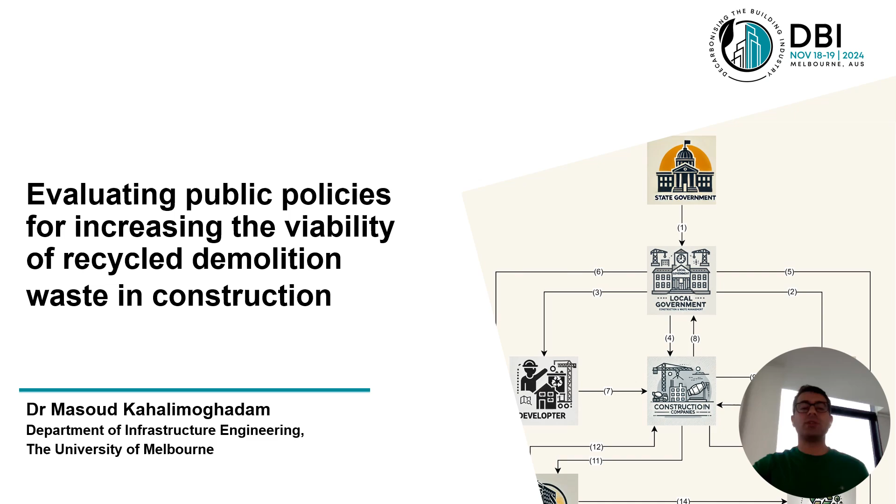Hello everyone, I'm Masoud and today I'm going to talk about evaluating public policies for increasing the viability of recycled demolition waste in construction. In my presentation, I'm going to talk about these topics: challenges, identifying stakeholders interaction, Melbourne construction activity as a case study, and future direction of this research.

Let's start with the challenges. The main challenge in this research is about fast growing metropolitans.

This is Alex. Alex grew up and lives in a metropolitan area, which is a very nice city. This city provides Alex a good economic situation, spatial connectivity, so Alex can easily have access to any resources, public transportation, any goods that he wants. Also, this city provides a high quality lifestyle for Alex.

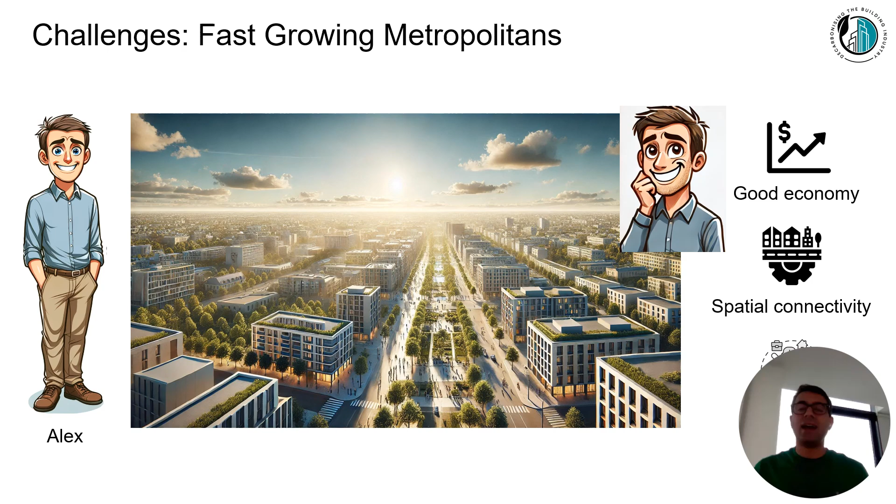But it's not only Alex who is aware of this situation. Very soon, lots of people from other areas think about moving to this metropolitan area to provide themselves and their family a better life. So people start moving to this metropolitan area, and it's getting bigger and more populated. Then this new population needs housing, and lots of companies start building new houses, very large towers.

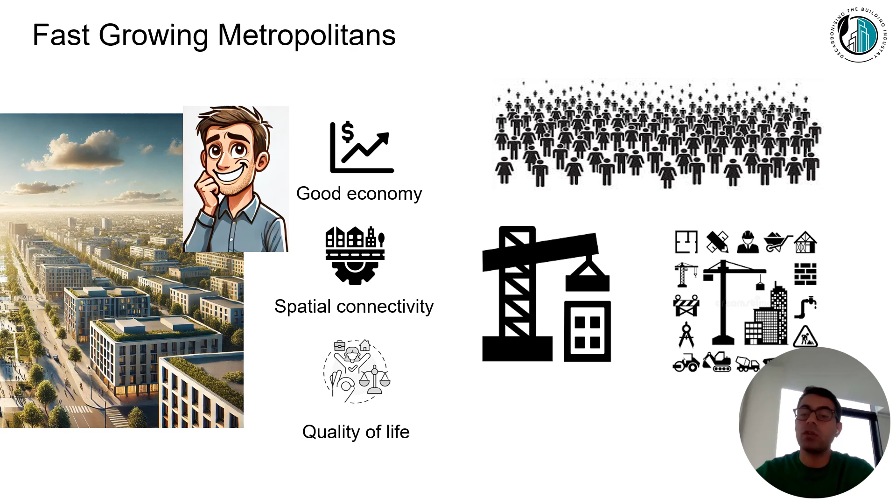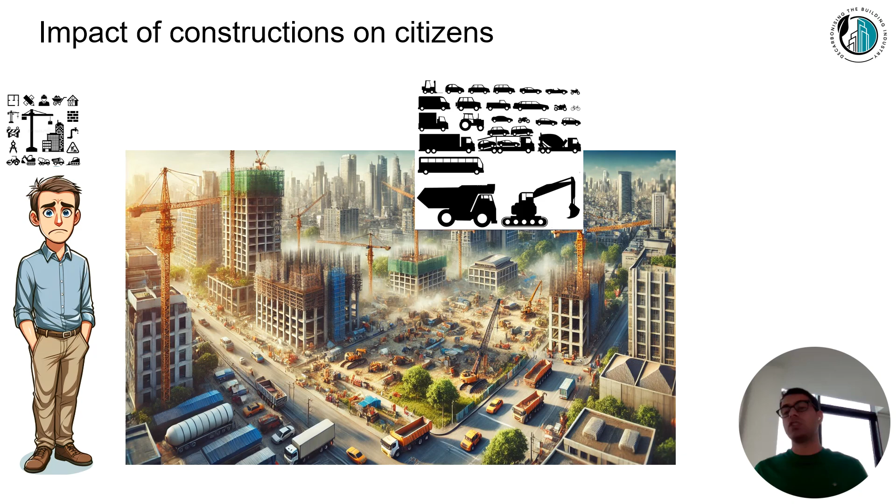As well as some shopping centers. So these activities need lots of construction, and very soon Alex realizes that the city he's now living in is not the same as before, because there are so many heavy vehicles, trucks, and construction machines, and these new machines cause noise pollution, air pollution, and also safety issues.

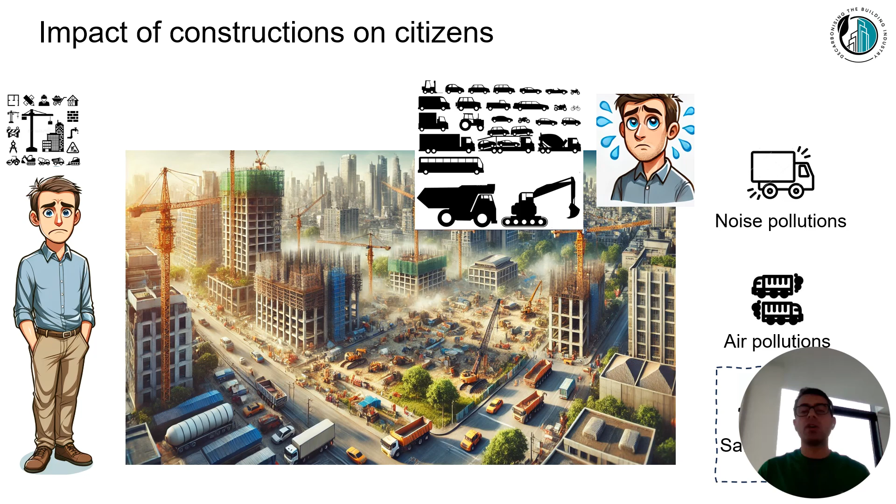For example, regarding the safety issue, in 2021, heavy truck crashes accounted for 15.4% of Australian road deaths, resulting in 163 fatalities.

So what Alex can do is approach local governments and talk about his concern with them. Local government usually has some regulation to reduce the negative impact of construction and construction waste materials on citizens, but the regulation is not enough for the new situation.

So local government has to communicate with state governments, which have more authorities. Luckily, they are in a way like the same family, so they have a very good understanding of each other.

But these governments are not the only stakeholders in the construction waste material industry. The other stakeholders are usually private companies, such as developers or demolition companies, and they have their own objectives, and most of the time their aims conflict with each other. So finding a policy or a solution that satisfies all of the stakeholders is not easy.

That is why we started to do stakeholder analysis. Let's identify the stakeholders in this domain.

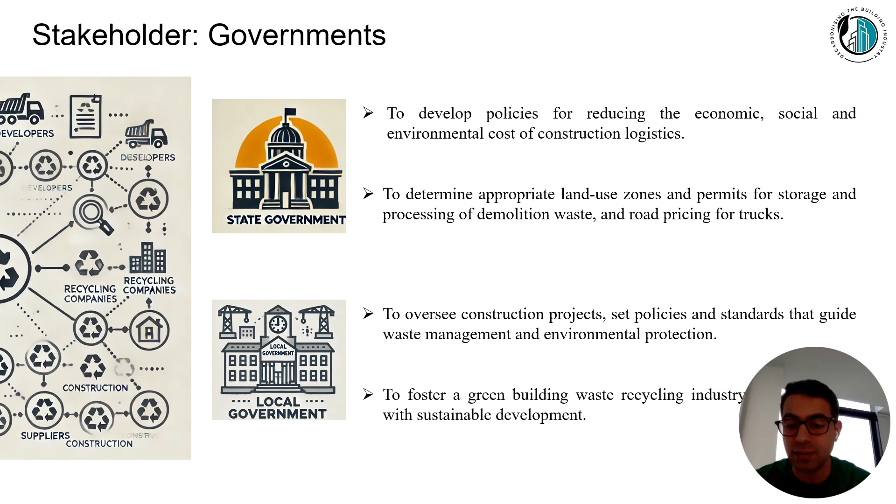and environmental protection. In addition to these aims, they are about to foster a green building waste recycling industry to achieve sustainable development.

The next stakeholder that we identify is developer. A developer is an entity overseeing an engineering project and bears the responsibility of managing the construction waste produced during the project lifecycle. Their aim is to maximize profit and improve the project fund recovery rate.

The next stakeholders are construction companies. Construction companies are entities that choose their production methods based on investment cost, economic benefits, and policy advantages. They can opt for traditional production, which may lead to resource waste and environmental issues, or they can choose green production, which focuses on reducing waste and ensuring environmental protection.

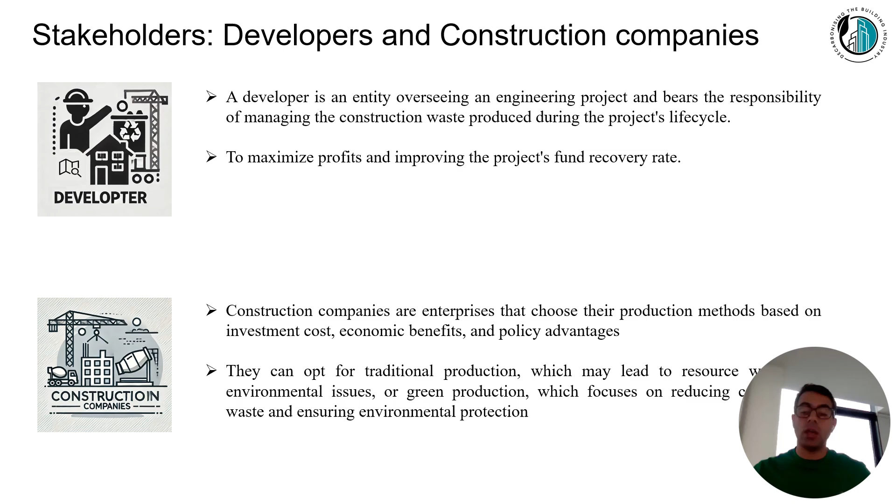The next identified stakeholders are construction material suppliers, who are entities that provide essential materials like concrete, steel, and wood to other stakeholders. They typically employ their own fleet for transporting material to construction sites, and they have to satisfy the minimum product standards set by state and local government.

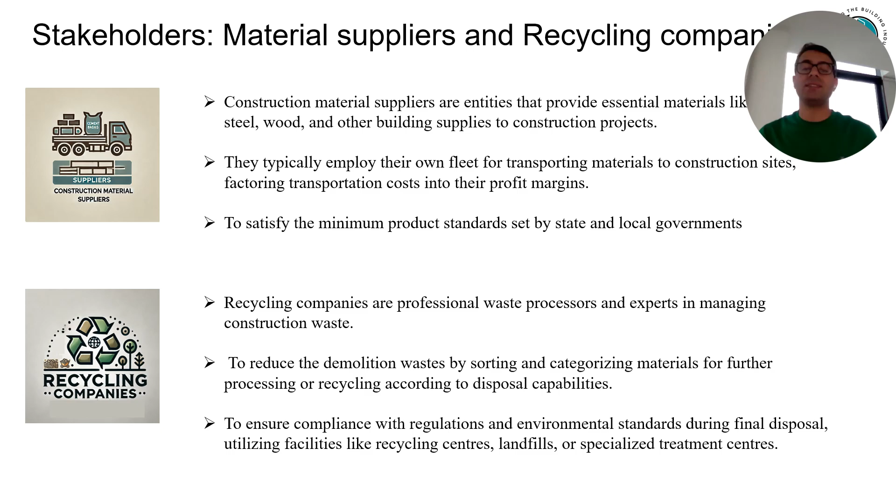The next stakeholders are recycling companies, who are professional waste processors and experts in managing construction waste. Their aim is to reduce demolition waste by sorting and categorizing material for further processing, and they ensure compliance with regulation and environmental standards during the recycling processes.

The last identified key stakeholders are demolition companies. They focus on safely dismantling and removing buildings and structures, playing a vital role in demolition waste management. They often leverage their own fleet to transport construction waste to recycling facilities or landfill areas.

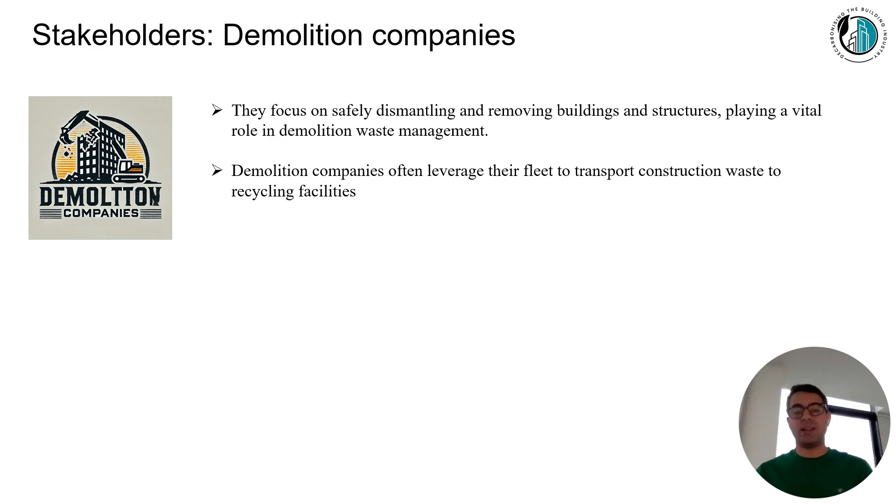decision number 4 is about regulation regarding emission and construction waste from local government to construction companies, and what construction companies must do to respond to local government is obey local government waste management regulation to avoid fines or receive incentives.

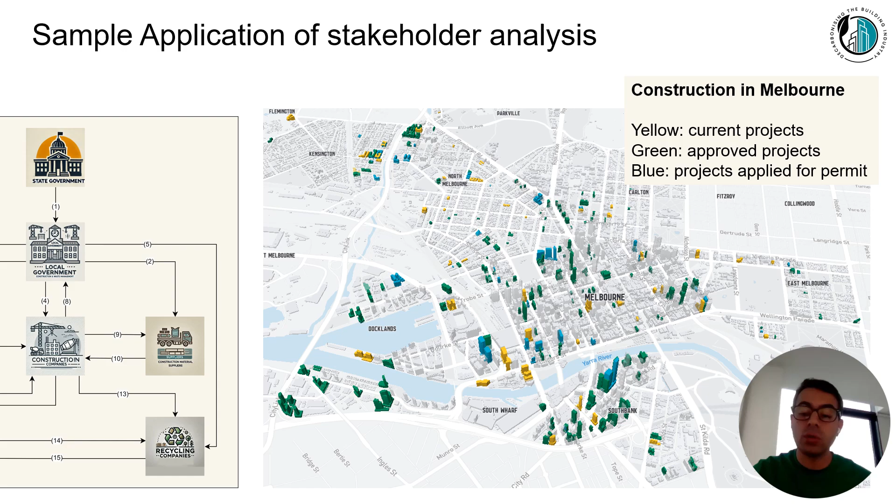As an example of the application of this analysis, let's focus on the Melbourne metropolitan area, especially the CBD area. You can see in Melbourne CBD, there are lots of construction projects, or lots of big construction about to begin very soon. So it shows the scale and importance of construction waste management.

Additionally, we identify the location of recycling facilities and also their capacity, construction sites, as well as concrete plants. We especially focus on concrete because concrete is very heavy, so it has a very high impact on construction waste, recycling and transportation. So we are developing a model suggesting that if we use recycled concrete to create new concrete instead of using, for example, sand, it's going to reduce the cost, and also

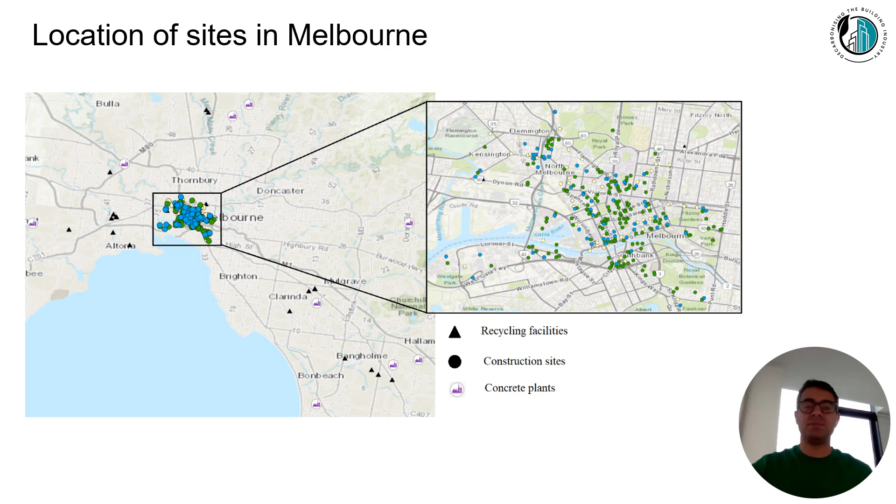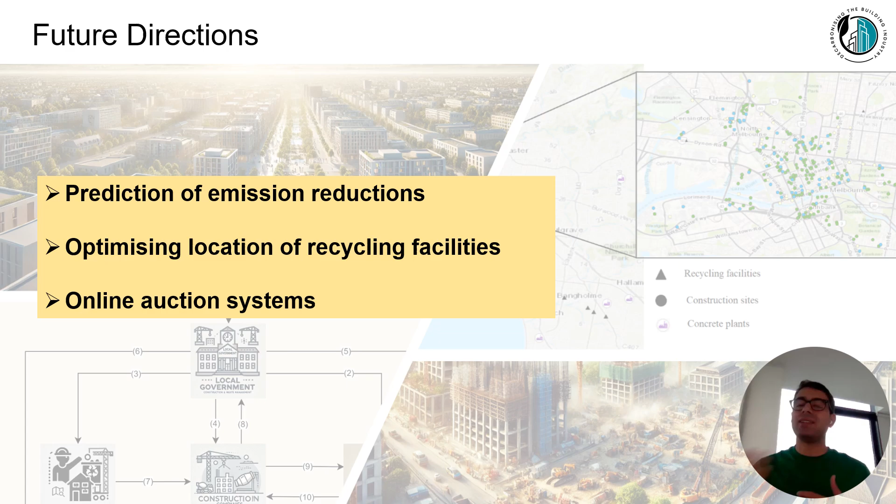increase the sustainability from the environmental perspective. And these are the three future directions that we are focusing on: prediction of emission reduction by using recycled material, especially concrete; optimizing the location of recycling facilities to minimize the transportation of trucks; and creating an online auction system that helps stakeholders find their partner at a good and fair price.

Thank you very much for your attention.